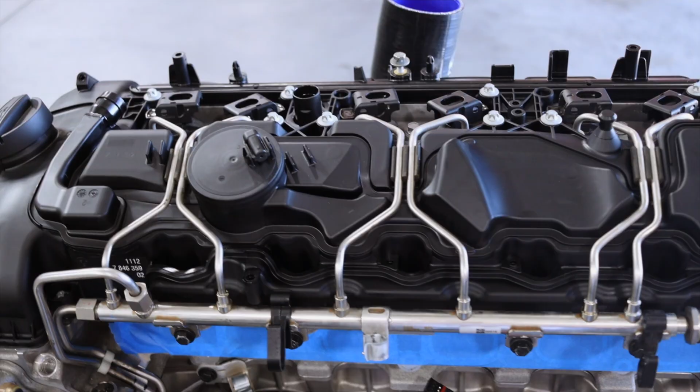Today we have another 2016 F82 M4 that we would like to share with you that came in to do some upgrades. This particular customer had a full bolt-on package previously before he arrived here and wanted to take the car to the next level with an upgraded crank hub and then E85, custom E85 tuning. What we'd like to share with you was what we ended up doing with the car, setting it up with a flex tune from 93 all the way to what we ended up with on E78 fuel. I'd like to share with you some of that data.

Alright guys, so the first dyno graph that we're going to show you is the one that is right at around 500 wheel and about 587 torque, the red and black lines that you're seeing. So this was the base setup for the flex tuning that we did on 93 octane only. This was with the full bolt-on package. This customer had some Dinan intakes, Dinan exhaust, and some charge pipe upgrades, etc., exhaust upgrades. Typical bolt-on package for what we do for these cars tuned on MHD. Obviously, once again, we're using F80 Paul to do the custom tuning.

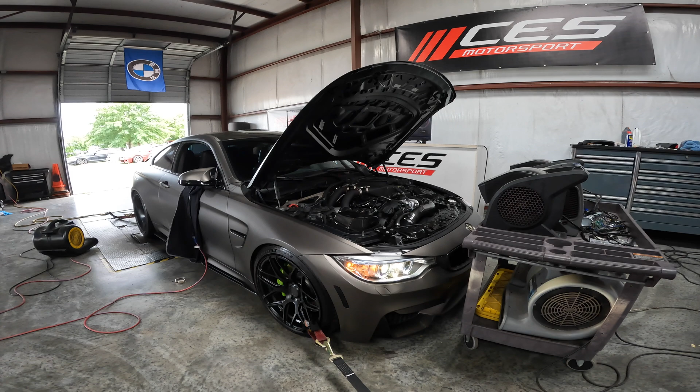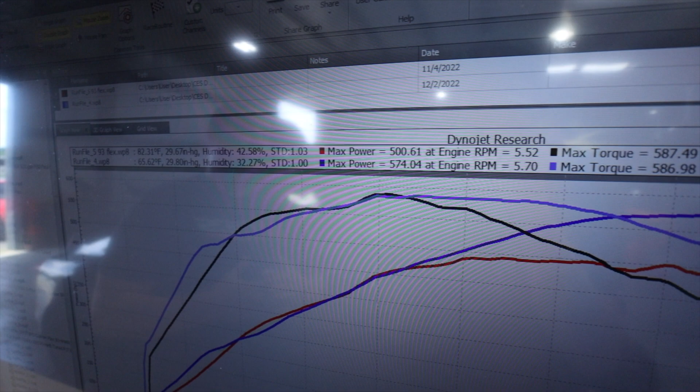With the flex tune, we began with a 93. Customer wanted to have a 93 all the way to E85 package. 93 numbers right around 500 and about 590 torque, just like we were saying. Typical numbers that we see for a full bolt-on, normally even stage 2 93 octane tuned M4. And then we went ahead and turned him up. We only got to about E78, but that was more than enough to get him close to 575 and keeping the peak torque roughly the same. But as you can see, the torque does carry over quite a bit more after about 4,000 RPMs, which is why you want to do the E85 custom tuning to pick up the additional power.

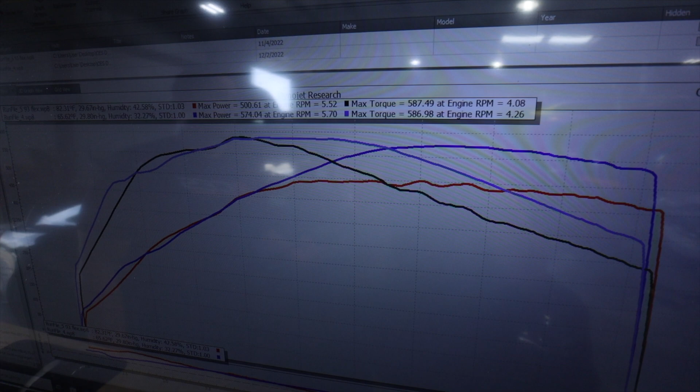This again was a stock turbo car with full bolt-ons. This is basically just the baseline numbers we wanted to compare to show you guys what a typical flex tune would be on 93 versus an E85, just in case people are interested in doing that kind of tuning on their vehicle versus doing a separate tune. Once we gave this back to the customer, he enjoyed the car for a while and then he contacted us again and wanted to take it to the next level. So we actually brought the car back and decided to really go all out with this one. He wanted a full build.

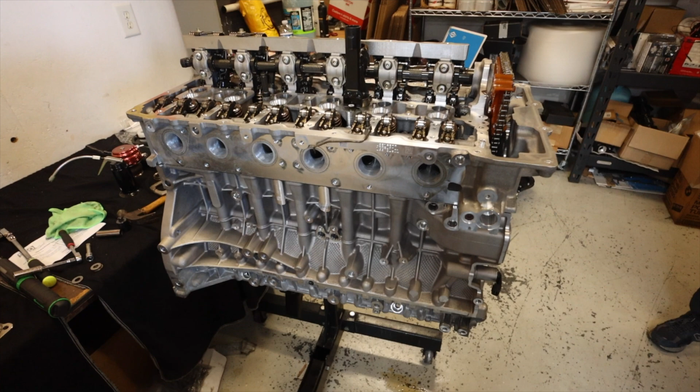What is going on, guys? I want to give you a quick rundown on this built S55. So this is the F82 M4 S55. It has 5150 CP Carrillo forged pistons and rods running stock compression. It has 625 head studs by ARP. It has our built ported head with the Ferrea valve train. Of course, we are running the insane 2-pin crank hub. We have the Dorch high pressure fuel pump lift kit, EU5 direct injection injector upgrade, which is from the S63.

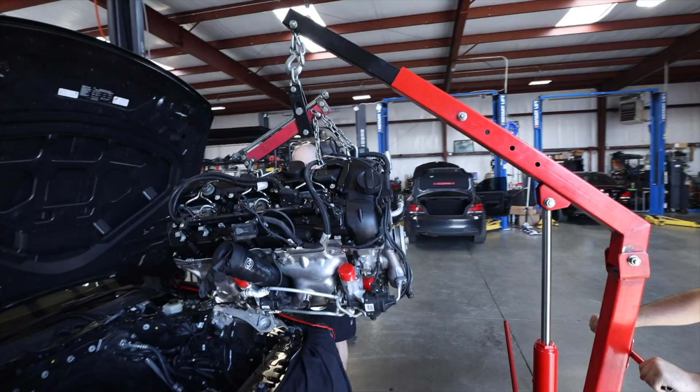For turbos, we are running the GC Max Vargas turbos, port injection with Motiv Reflex and 950cc port injectors, the CES custom meth injection kit, and for the clutch, we are running Clutch Masters FX1000 with the upgraded hydro bearing. The customer originally had Dinan intakes on this car, however, we did decide to upgrade those intakes to the front mount intakes by RK. It has the complete cooling package from CSF, and then lastly, it is tuned by Paul Johnson. And those are really the main components in this entire build.

The customer did decide to switch out the original wheels and tires, ended up going with the Apex Arc 8s in satin black, and then also a set of Nitto tires to make sure that we could get some traction out of this thing. Overall, a pretty insane build. Lots of moving parts, a lot of different people involved, and really no expense was spared on this one. The customer wanted his manual M4 to make really good power, but also be streetable, even something that he could just daily drive. I think that this S55 build is a really good middle ground.

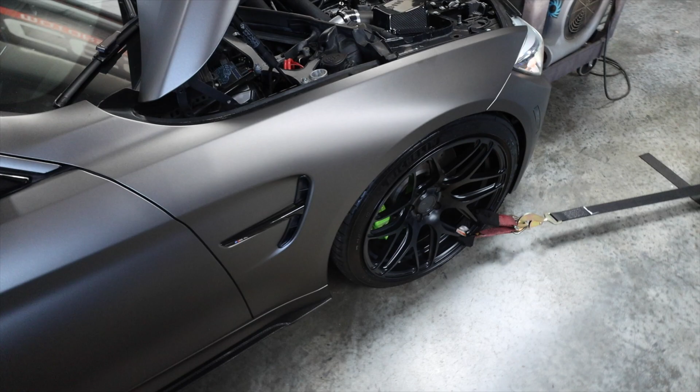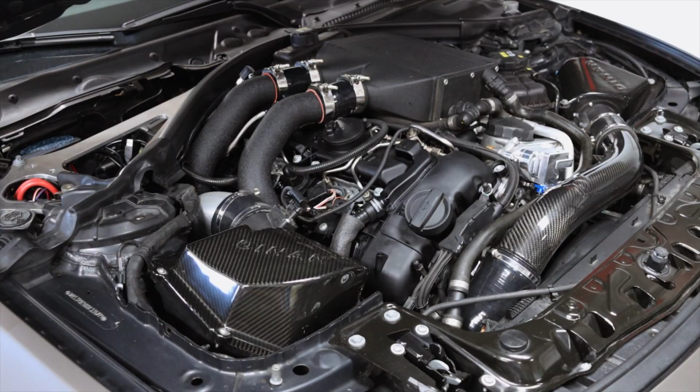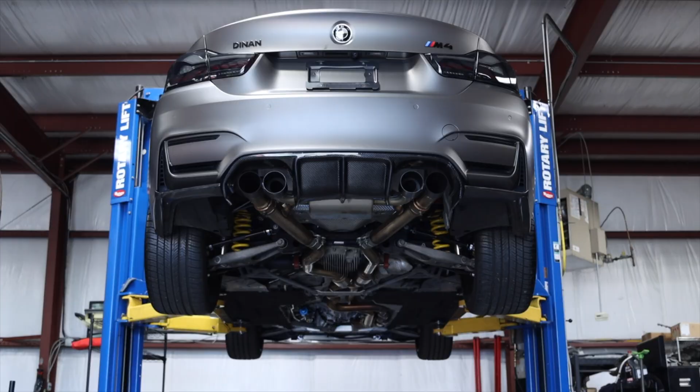Alright everybody, the final day has come for us to get this car on the dyno after the complete build process that we went through. Obviously, from what you guys have seen, the full built motor package, driveline upgrades, the works, fueling package, etc. So just a quick recap before we get into the numbers. This is obviously one of our fully built motor packages with 5150 Autosport. Thanks Ion for the Pro Extreme package that we installed on this motor. This is also one of our extreme ported cylinder heads with the fully built Ferrea valve train.

This is our motor package that we offer for the S55, so if anybody's interested, we'll have that stuff listed on the site. This one also had fuel system upgrade, pre-R stage 4.5, plus Motiv Reflex, PI 950cc injectors, had the Dorch lift kit U5 injectors, and we also did meth injection on the car, so dual jet 100% M1. Pretty much rounds off all the power adders and everything if you wanted to know what kind of package this was to get to this level. Customer wanted to do the twin upgrade, so we did the Vargas GC Maxes to get to this power level.

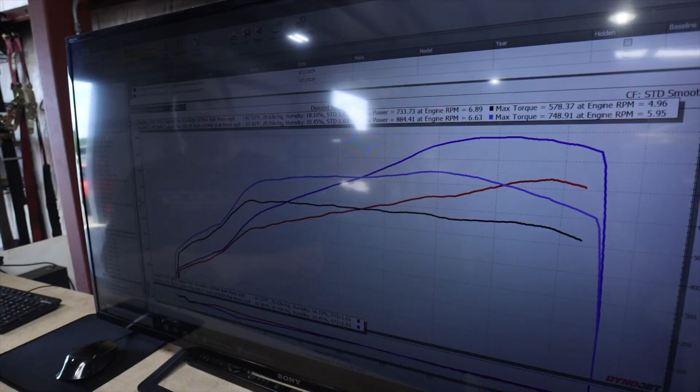Also wanted to note that this is one of the more rare manual transmission cars that we've done, which does have an upgraded FX1000 clutch with the hydro bearing from Clutch Masters to be able to hold this power that we put down. So once again, we started this build with F80 Paul doing the custom tuning with Pro Tuning Freaks Bootmod3.

The first lines that you see in red and black are the 93 tuning that we did. This is again a flex tuned car, so it's going to have tuning from 93 all the way up to E85. This is with supplemental meth injection. We decided to do the tuning with meth injection on. The meth injection is there for extra cooling and a little bit of extra octane, and just as a safety precaution for the overall power that this car ended up making, since it is going to be utilized on the street. Power numbers that we did see on 93 meth are 733, almost 735 wheel and about 580 wheel torque.

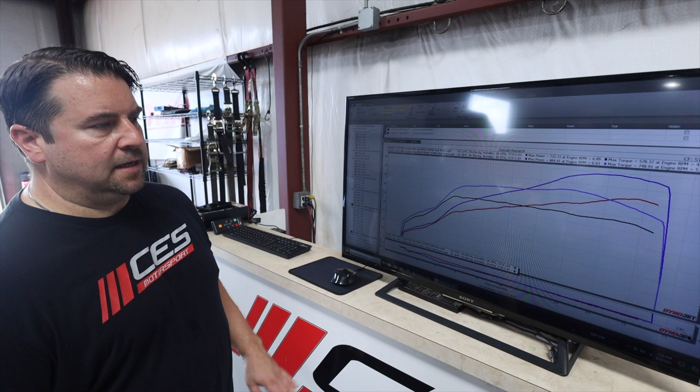We did keep the torque a little bit on the lower side on the 93 tuning, simply because this is again going to be utilized mainly on the street, so we wanted to give the customer the ability to handle the power on the car pretty nicely and not to overly stress the driveline, since it is a manual transmission. But then, as you can see, when we did go and turn it up to the E85, which actually came out to about E78 for this dyno session, we were right at about 885 to the tires and right at about 750 torque. So a massive increase, obviously, with the E85 flex tuning.

So at minimum, this car at any given point is going to be a plus 700 wheel horsepower car from here on out. And then at the max numbers, you should probably see 900 wheel on cooler temps. I mean, we were almost at 90-degree temps ambient. This customer also is going to get upgraded RK intakes, front mount intakes, which should probably increase the flow a little bit. And we're going to actually show you that difference once we have that installed on the car versus the current carbon Dinan intakes, just to see what difference we can get with front mount flowing intakes versus the Dinan ones.

So while we have the data here, and since we were able to do the full progression of this build from start to finish, the green line is what we had talked about way back when we had the car here with just the stock turbos and bolt-ons with the 93 flex tuning; we were at about 500 wheel. Once we did the full built motor package and the GC Max turbos and all the fueling upgrades, etc., you can see how that number has increased by over 230 wheel horsepower. Peak torque levels, like we had said, are roughly the same at the 93 tuning level, just to keep the car happy. But the massive increases at the top end flow with the GC Maxes versus stock turbos.

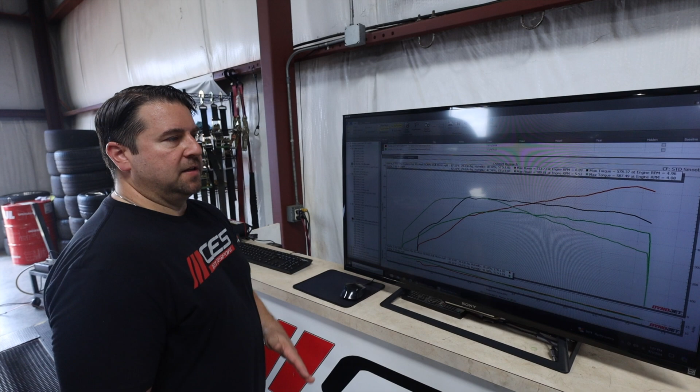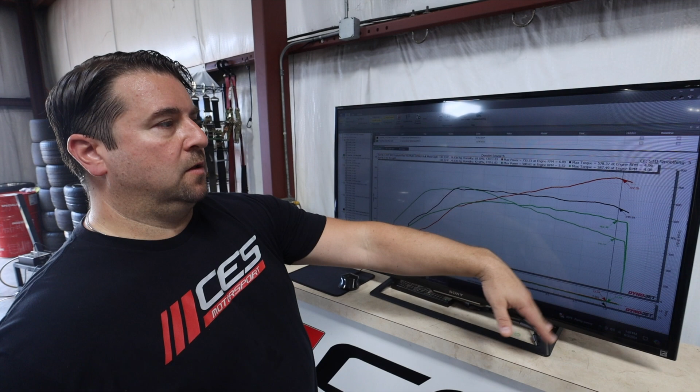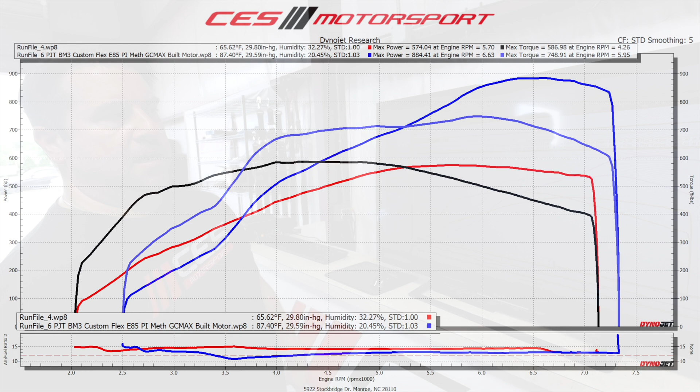So this is a great comparison to show you what a fully built S55 motor can do versus stock turbo stock motor. At 7,000 RPM, we're at 462 wheel versus 727 wheel just on the 93 tuning. What we're going to do next is show you the gains that we did on E78 in stock form versus built motor. 575, about 586, 587 was what we were seeing with stock motor, stock turbos on a custom E-blend tune, again at E78, and then the final numbers that we just came up with, the built motor package and the GC Max turbos. So huge gains.

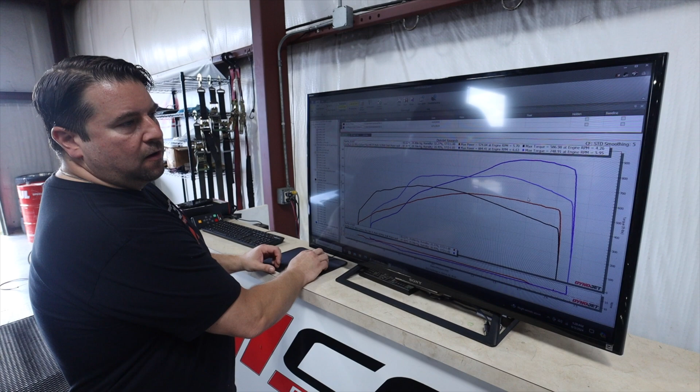I mean, you're at 575 and we went to almost 885. So 300 wheel horsepower gains. Even at 6,500 RPM here, you're close to 556 versus 882. It's almost a 330 wheel horsepower gain versus what you would see on a stock motor, stock turbo car with a custom E-tune. One thing to note is that with the ported cylinder head that we had included on this car, plus the GC Maxes, we're running only about 33, 34 PSI to get to these numbers. So you can really see the increase in the top end flow, which is why we like doing the ported cylinder heads on these built motor cars.

Overall, these are exactly the numbers we were hoping to see out of this build. It's not overly aggressive. It's going to be a nice daily street car for this guy, even at these power levels. Huge numbers out of a manual trans car. Not sure if there are too many other ones out there that are making this kind of power, but the next step for us is going to be testing on the street, so you're going to see some of that coming up next, and then follow it up with some customer reactions once he finally gets his car back and gets to enjoy it. But overall, really amazing and exceptional builds. We were really excited to get this one done for the customer and can't wait to get it back to him.

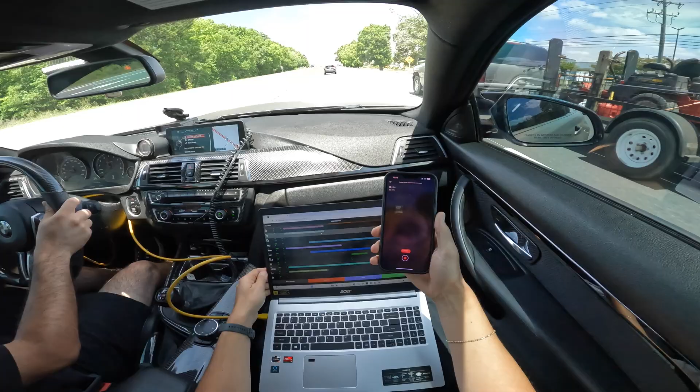908 wheel horsepower. Yeah, like 908, 906. How's the clutch feel? It doesn't feel that bad. It just definitely needs a clutch stop. Yeah. Car's hooking good and everything? I don't know, we're gonna find out here. I'm just gonna do like just normal driving for a little bit. Okay. Feel everything out. Car a little warm here.

Grab's good. Holy shit. That clutch grab's hard. Yeah, it's fucking brutal. I'll tell you what, it feels pretty good. Feels pretty good. It drives smooth. It does drive smooth, yeah. It doesn't like... There's just like a little bit of lag in between gears. Yeah.